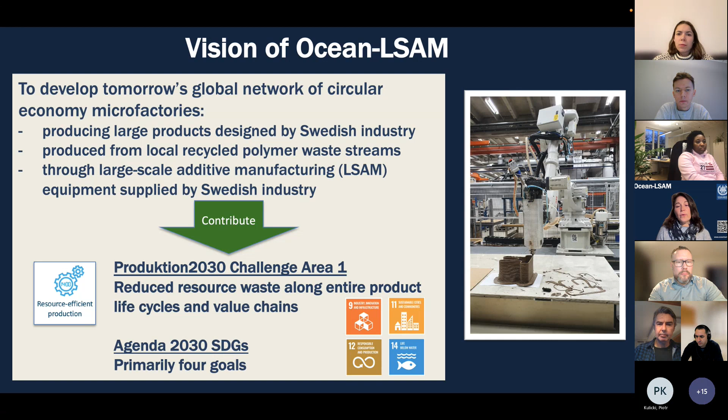The idea is to be using large-scale additive manufacturing, but this equipment should also be supplied by Swedish industry, as we know there are quite a lot of firms working in this space as well. Through our vision, we hope to contribute to both Challenge Area 1 of Produktion2030, which is reduced resource waste along the entire product life cycles and value chains, but also clearly contributing to fulfilling the Agenda 2030 SDGs, primarily goals 9, 11, 12, and 14. So this is our overarching vision.

We've been working on our feasibility study and towards this Step 2 project, which we'll be filing an application for. If you take a step back and ask what is the goal for this project and how does it contribute to Sweden's competitiveness, the idea is how can we really push the boundaries in terms of digitally transforming manufacturing, and while doing that, really fulfilling the SDGs.

This is a sketch of a microfactory in Portugal, which Ocean Tech Hub has been working with. Is it possible to dream and say that you could bring in a waste stream on one end, shred it up and grind it up, turn it into pellets, and then turn it into some type of product for the local market through additive manufacturing? This is a vision that Ocean Tech Hub has had now for about 4 years.

This has been spreading because we're now working together with Ekbakken Studios in Sweden, one of our partners. Ekbakken Studios would like to ask: how can we design a product that could then be sent out to local microfactories using waste streams and produced locally for the local market? So can we create a global network of circular economy microfactories? But clearly, there are so many challenges to getting to this vision.

Today, we have a very low plastic recycling rate. In Europe, it's around 32%. We are tackling the challenge of fishing nets made of polyamide, PA6, which today has only about 1.5% of fishing gear being recycled. This is a huge issue. Every day there are tons and tons of fishing nets being used, and as we know, they can end up as ghost nets if they're not taken care of properly. So this is one of the major challenges we're taking on.

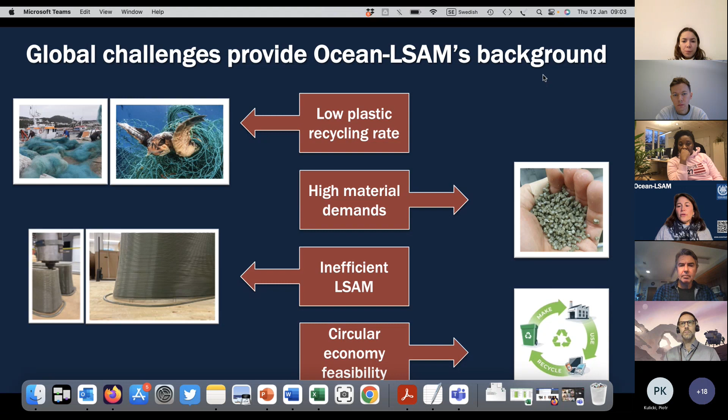So what's been going on is very much a trial and error process in terms of trying to get this whole aspect of taking plastic, grinding it down, and printing it out. As of today, if we look at how far circular economy and microfactories have come, a lot of it is still very much in the conceptual phase. We have very little empirical evidence of how we can actually make this work. So this is the background to our project.

If we look back at what we've been doing in this step 1, 6-month project, we have 5 work packages. The first one is looking at the recycling of ocean plastic, the ocean polyamide, turning it into material that could be used for large-scale additive manufacturing, which is then taken care of in work package 2, which is how we can actually design and produce this using this material.

The third work package looks at how we can streamline this process. Can we develop computational models to facilitate the whole process from designing something to actually having it printed, so that we can reduce the amount of waste? One of the main goals here is how we can streamline this process, remove the waste, and ensure that we could actually create these microfactories.

The last work package is about developing the concept and the project management and application, which we'll be putting together for the step 2 application.

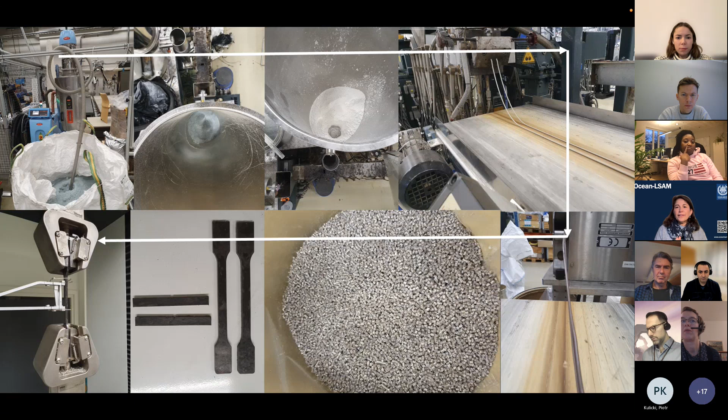Johan, are you there? I'll stop sharing my screen — sorry, I'll continue sharing, and Johan can just step up here. Great, thank you. Yes, I'm here.

Okay, so my name is Johan Landberg. I've been working at RISE for roughly 6 years, and we started collaborating with the Ocean Tech Hub during 2022, and it panned out into this project.

So what we're looking at now are a few steps in the material development for this 3D printing. We start with, on the top left corner, chopped up fishing nets, polyamide fibers, which have to go in the dryer you see in the picture, and have to be dried. We usually dry it overnight, then feed it into our compounder and mix it with talc in this case. It comes out as 2 strings, which have to be cooled down, and then we pelletize it.

For this project we haven't done any mechanical property testing yet, so that's why we don't have any good looking test bars — the test bars shown are from another material, so it doesn't turn black when you injection mold it, just so you know. We can then test the mechanical properties to see how it behaves and what kind of effect the filler has on the material, since it shouldn't only be printable, it should also be durable and sustainable.

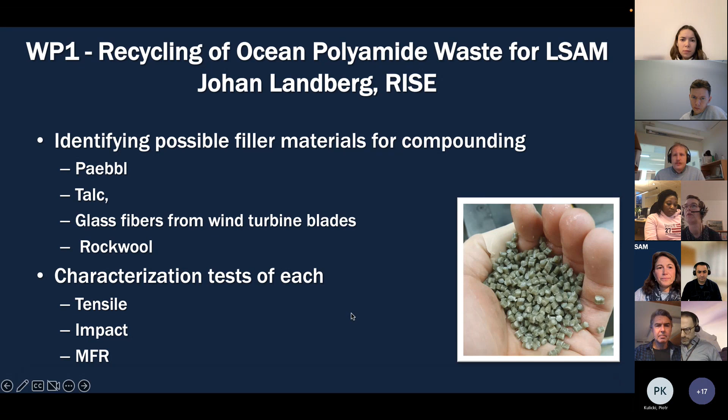Let's go to the next work package, work package 2, which looks at: now that we've created these pellets for LSAM, what are the next challenges related to that? We have Woodrow from RISE as well. I think, is he online? I'm not sure if he would come online yet. I can't see who's in. Okay, he's online, great.

I was then thinking maybe Carolina from Ekbakken Studios, you're in the picture here. Maybe you could just say a few words about what you've been working on with Woodrow here.

Yes, as we see here, we're test printing a first batch with fishing nets. I believe this was with glass fibers coming from recycled wind turbine blades. We see here that we don't really have the nice surface that we, as Ekbakken Studios, really want to have for our furniture. A challenge we have is the first layer adhesion is very difficult with the polyamide shrinking.

So that is something we want to work with for work package 2, trying to see what we can optimize — printing speed, layer height, layer width, and so on — to find the best results. We will be using IR cameras to get specific real-time data to see the actual temperatures of the materials when we're printing. This knowledge and data will go into the simulations for work package 3 that Mohammad will talk about.

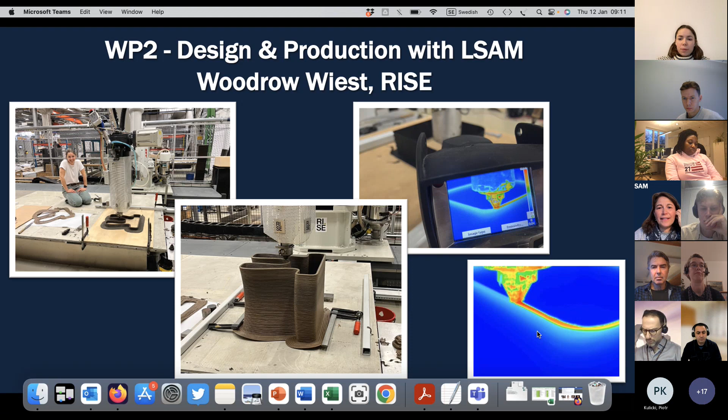So what we've looked at so far is taking these fishing nets, grinding them down, turning them into pellets, and then putting them into RISE's large-scale additive manufacturing machine, and then asking: how can we really improve this process? Because you see there's a lot of warping, a lot of issues. So the idea is we'll be collecting data, and what we're going to do with this data — I think what's really exciting is the next piece that Mohammad has been working on, who's come into this project now, and he'll take us on a computational model journey. So Mohammad, take it away.

Thank you. My name is Mohammad Rouhi. I'm from former Swerea SICOMP since 2012, and RISE. I'm quite new to additive manufacturing process simulation — I'm coming from a background in polymer composite process simulation. So there were a lot of nice challenges here in setting up the process.

Basically, we have a part that's been designed, for example with Ekbakken, and then we turn it into a mesh. They will also provide a G code, and from that we have a Python code that will generate the event series of this G code that goes through the printing, and would have a kind of cross path with the mesh that we provide. A concept of element activation will generate the print path through the part, as we will see.

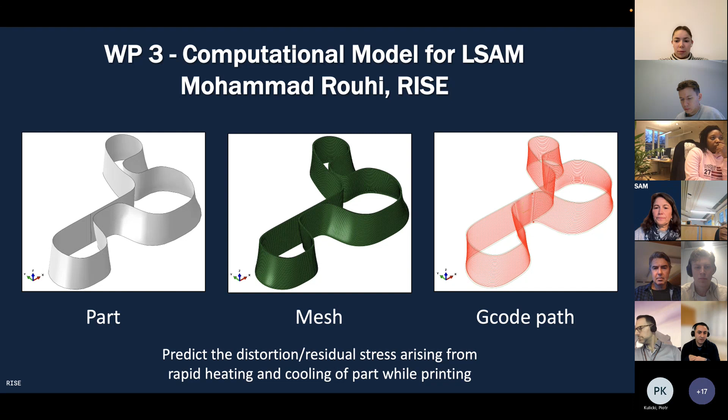The simulation is being performed in Abaqus software with the additive manufacturing plugins they have provided since 2017, added to this system. The idea is to predict distortion and residual stresses from the physics that are happening.

So basically, what we would like to have is a two-step analysis: a thermal analysis, a heat transfer analysis, that generates the temperature profile from the first step where we are printing. Then, with that temperature profile, we have a structural analysis where we look at the distortion and residual stresses as a result of those temperature profiles generated in the first step.

So the capabilities we'll have here are some geometrical features that, hopefully, can help us provide and predict defects during printing if all the process parameters can accurately be used there, or can we optimize them. We'll also go on with temperature-dependent material properties — if we can characterize some, we'd be able to look at how they affect the properties of the final part.

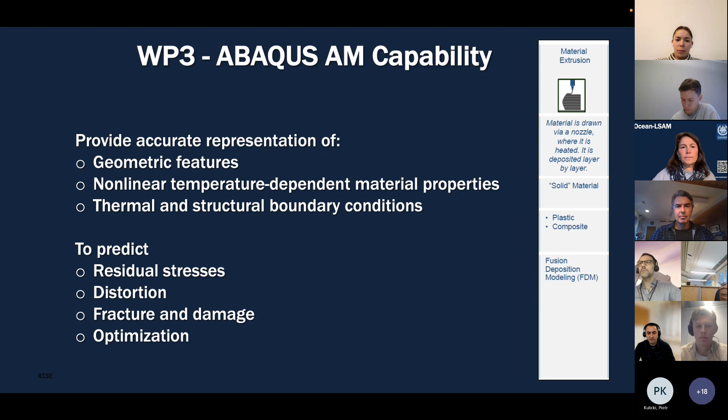So in a sense, from design to manufacturing and also some loading conditions after the part is manufactured, we are able to connect all the chains and dots there. Some preliminary simulation has been performed so far on a piece of the furniture part that Ekbakken has manufactured.

One more click, Robin, please. So here what you will see is that on the left we have thermal analysis of the part during the print, where the temperatures are being calculated from the thermal boundary condition that we have with a 225 degree print, 225 degrees of the melt during the print, and also we have an 85 degree temperature on the bed on the floor that is always constant.

And then on the right you will see the structural analysis and the displacement and the deformation of the part, and also the stresses that are formed on the part as a result of the temperature that we see on the left in the first step.

I have details of the setup and going through the analysis steps, but I guess I can leave it for the discussion if people have more questions. So before going through too much detail here, I leave it back to you, Robin. And if people have questions, I would be happy. It would be nice if any other people here in the meeting have any other experiences with simulations here, to exchange ideas and see how they approach and attack this challenge, and it can improve.

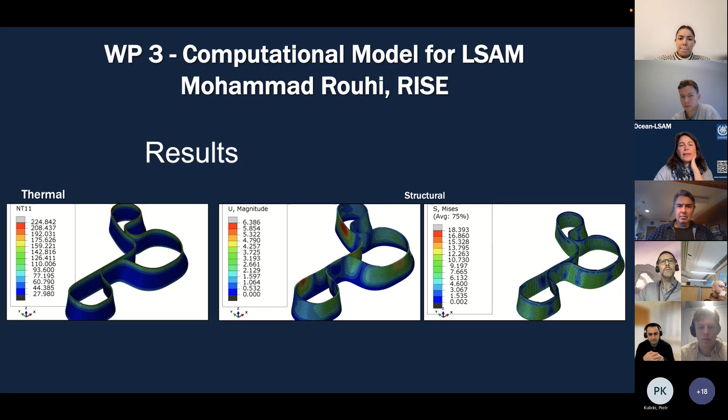In addition, as mentioned, we have a few industry partners, three of them. We have Ocean Tech Hub in Portugal, we have Ekbakken Studios in Sweden, and Artex in Sweden. So I'd like each one of them to give a couple words about what they're doing and why they're interested in the project, and let's hear from them.

So let's start with Ocean Tech Hub. We have Jon-Erik Borgen, who I can just mention is really interesting in terms of bringing his expertise to this project, with wide, extensive experience in the oil and gas industry and also working with simulations. He and Mohammad have been having quite a few interesting discussions. It's fascinating how you can take knowledge from one industry and bring it into a completely different application, but yet still bring that knowledge in. I think that's one of the beauties of working in these collaborations.

So let's listen to Jon-Erik. Let's listen to you, what do you have to say? Yeah. Oops, I'm sorry. Yeah, oops. Yeah, whoops, there we go.

Hi, Jon-Erik Borgen. I'm one of the founders, together with Robin, of the Ocean Tech Hub in Peniche. I guess this is our dream project, doing what we're doing here, completing the circle, where we can see how our initiatives in Peniche with the fishing nets can be properly investigated and turned into some local pilots, as we already have in Peniche. As a background, I'm a naval architect. I've been working with structures and hydrodynamics and how the waves are working on the structure, so my background on simulation is from there. The goal we have from Ocean Tech Hub is the circular economy model, as we had shown before.

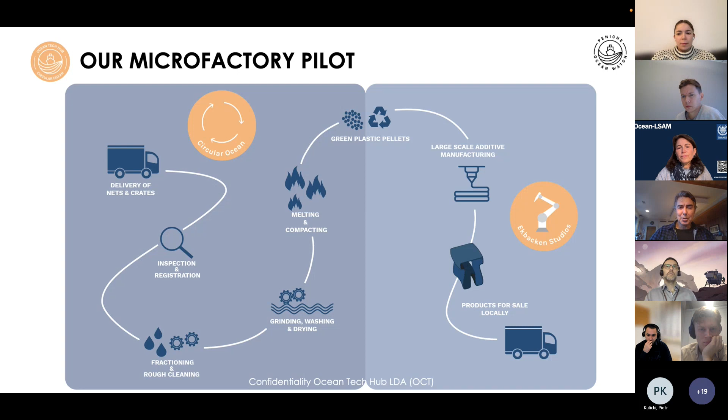So in general, we want to see how this can be done locally, and so we are working very closely with the fishermen in Peniche. We have so far collected something like 55 tons of fishing nets, these polyamide gill nets. Interesting story there is that these nets are actually only being used once before they're thrown away, because the fisherman wants the very pure quality when they are in the sea. So it's really a waste material.

It's a hopeless situation, of course, but we have a big amount of nets to pick up from them and to find a waste stream of.

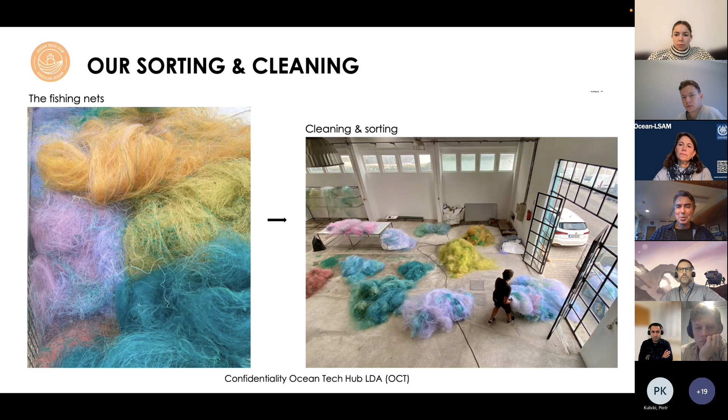Here you see some of the process we have with the collecting, cleaning, or sorting, and bringing it in from the harbor. We have a warehouse where we try to sort even by colors for the premium clients who want a very special sorted material. And then you can go to the next.

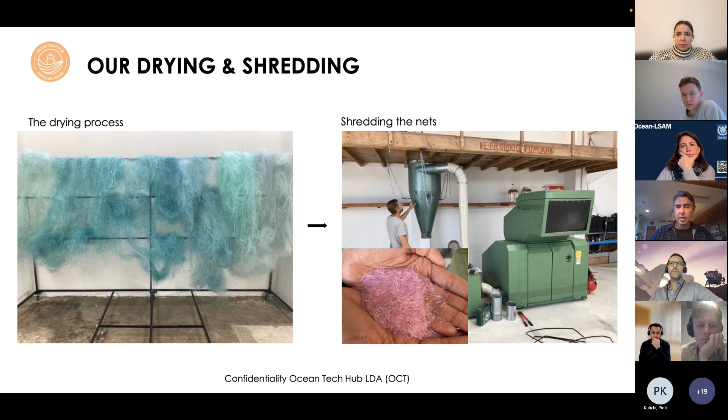So we have a process there where we wash it and dry it, and then we have one of these shredders from Sweden actually, where we can then take down the material to fibers or smaller fibers, where the extruder process can be done in the compounding work from Johan at RISE.

So what we have done is we created this brand, Penilon, as we have called it, Peniche Nylon. It's so far successful with where we use talc, which has been working well and which is a local product in the area of Peniche. It's shown to be a very interesting material compared to many of the other 3D materials as we see it and as it's responded in the market.

Yeah, and again, of course, we have all these goals to meet the UN sustainable goals, and we feel that we are contributing well in doing this with our projects here.

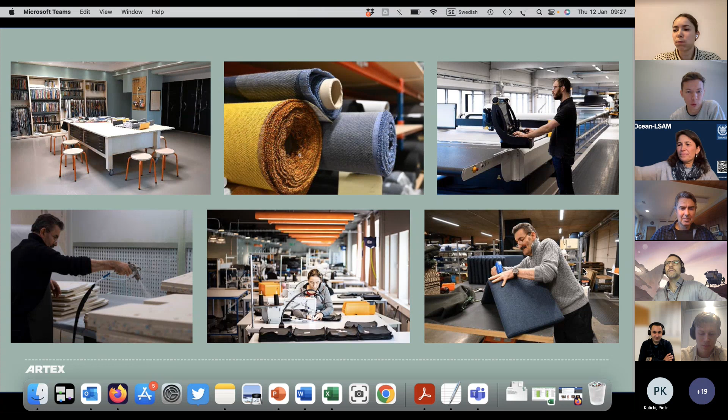Sure. Excuse some background noise from the ventilation. Anyways, so I'm Jonathan, representing Artex in this case, and we will be the manufacturing partner in this project.

Artex's main focus is more about fabrics and upholstering, so we do much manufacturing of products related to that, including some kind of sewing and fabrics. But we are very forward-thinking owners, so they always want to be at the forefront of these techniques and industries. So now we are embarking on this new path, and we are very excited about this whole project and to see what it can bring to us. We will also make these cushions too, which you could see in the previous pictures. So there's a kind of connection there as well.

By doing this kind of investment for Artex, we also get the opportunity to use this machine for printing during development phases and testing prototypes and solutions, and we can also find other customers for potential other projects and products that could make use of these 3D printed parts of different materials.

So before Christmas we actually purchased one 3D printing machine, which will be delivered in a couple of weeks. We were super excited about this and to start playing with it. Thanks to Ekbakken's hard work previous to this, we could probably just plug and play, because they have done so much work together with RISE optimizing all the G-code and stuff.

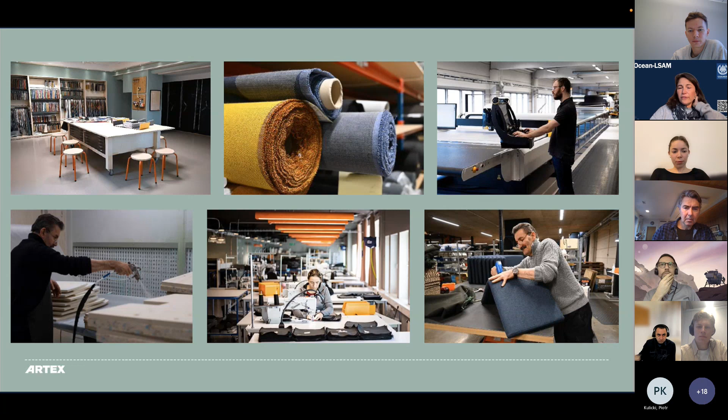We're just about out of time, I'll just wrap up here, just to go through again. So step one has been a 6-month project, and you've seen an idea of what we've been working on. In terms of moving forward, we're open to looking for new partners to come in and help us further develop our vision, or move towards our vision, of creating this global network of microfactories.

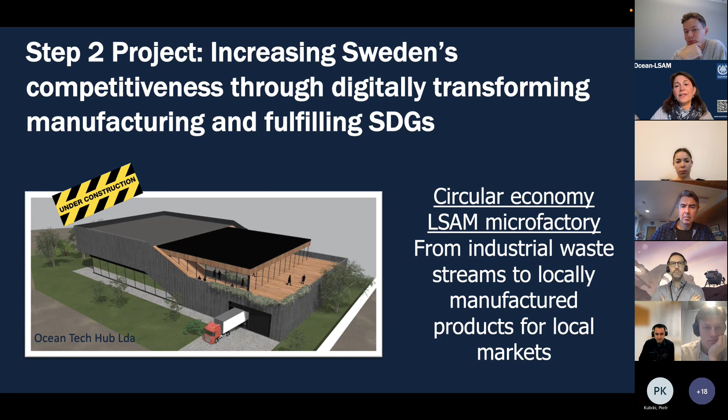And then clearly, to get back to the whole point, how can we really facilitate moving towards challenge area 1 of reduced resource use and waste along entire product life cycles and value chains, and clearly improving the competitiveness of Swedish industry.

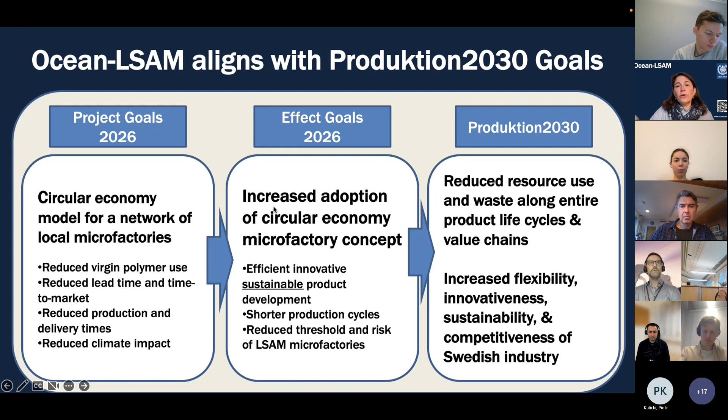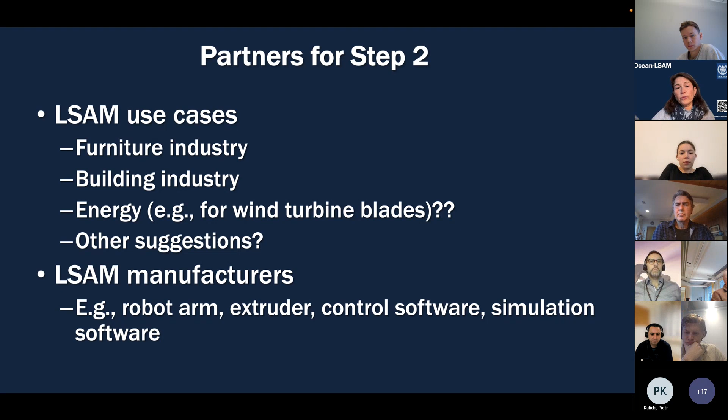And then also working with, say, the manufacturers of this equipment, working with either the hardware or the software. So if you'd like to join our team, please contact me, there's my email. Yeah, thank you very much. I'm very happy that all of you were here to listen to our presentation.